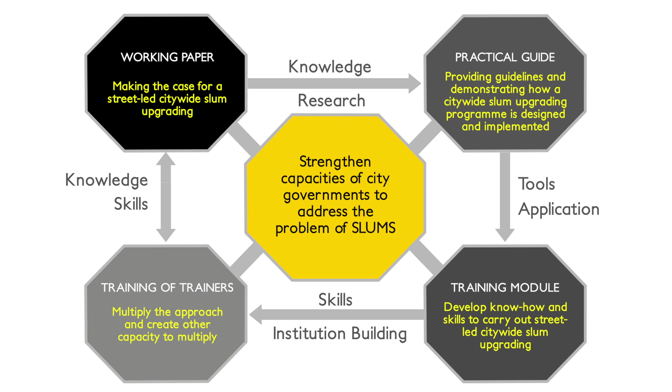This is part of a trilogy of work we've been doing in UN Habitat. We develop a working paper, then we develop a practical guide, how you move from project-based interventions to citywide programs, the steps you need to make, and then we develop training modules that we are applying and using with different city teams, and we hope that institutions, professionals will use this knowledge and the tools we've been developing to multiply and create a capacity around cities to address this fundamental problem, slums.

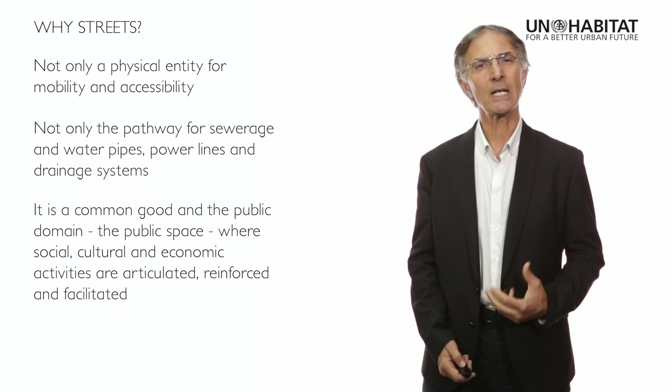Well, it's a vital element to improve the quality of life in urban areas. It forges identity because it creates address, the place making for communities, individuals, business. So you create the physical location of people, addresses, where you provide the basis for the legalization of tenure and defining rights and obligations, both of the state but also of citizens, by means of property taxes and services and so on.

Streets are also very important to define the urban pattern of a slum that will become a future neighborhood integrated to the city. So it's very important that we understand the role of streets, not only to create the physical structure, but the conditions for socio-economic integration and curbing what we call the social exclusion.

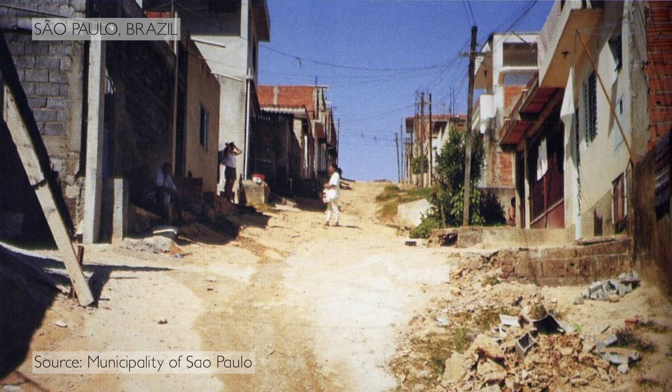Let's look, for example, in this case in São Paulo. In this photo, you can see very well that this is an informal area. The streets are not defined. The accessibility is very poor. You see the conditions of the housing.

Let's look at this case in Tirana, for example. In the periphery of the city, after the 90s, an incredible, remarkable, informal, unplanned urbanization took place. People were occupying available land, collective farms, and transforming. And then a group of professionals set up an NGO and started working with these residents and said, look, we have to define the public space, the future streets of these neighborhoods.

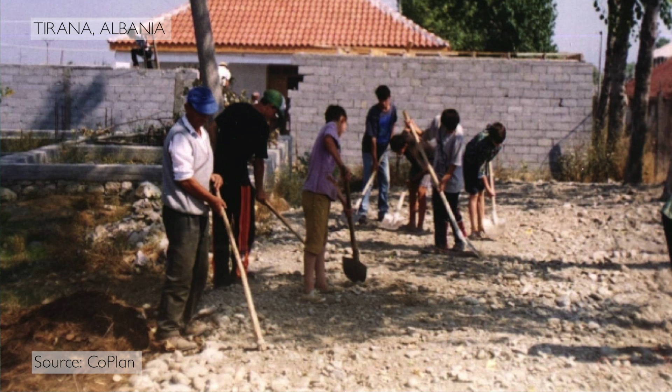And they actually got a recognition and a prize for this project. And they not only define the physical space, but they start creating communities by getting people involved in improving and defining what was called the public space, but in fact, future streets that connect this area to the rest of Tirana.

So now let's look at the problem of slums. The universal definition used by UN Habitat is very important because it allows us to define the scale and the magnitude of the problem and to monitor the implementation or achievement of the Millennium Development Goal 7 Target 11.

Well, the definition says that a slum dweller is one that lacks one or more of the following: the durability of housing, so whether the house is permanent, permanent or provisory building materials; inadequate living space, because we want to measure overcrowding; inadequate access to improved sanitation and improved water; and lack of security of tenure, which translates into the protection against forced eviction. Now, in a nutshell, I would have to speak about 4 points.

Urban growth has become a synonym of slum formation, which means cities are growing on the basis of informal land development and not on the basis of a plan, an enacted urban plan or a land use ordinance. We have an unprecedented informal and unplanned urbanization that is affecting the sustainability of cities. And now today we have that 1 out of every 3 urban dwellers lives in slum condition. So we have nearly 1 billion people living in these conditions.

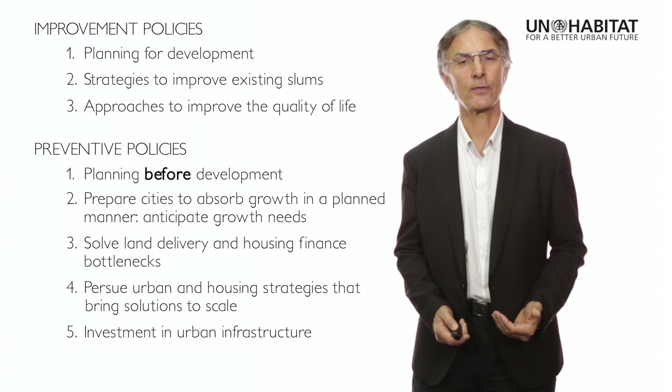Improving means planning for development. There is an existing informal settlement, an existing slum, and we need to improve. We need to design an approach to improve the quality of life. And on the other hand, planning before development: preparing cities to absorb this growth in a planned manner, solving the land delivery bottlenecks, creating opportunities for housing at scale, investing in urban infrastructure. These are some of the policies and strategies that help cities actually to prevent the formation of slums. We argue that this should be one single policy: slum upgrading strategy and urban housing strategy.

So the focus of my session is actually the planning for development, the area-based plan, opening the streets, creating area for infrastructure improvement, involving the residents, regularizing land, and so on. So we need a paradigm shift. More than 50 years of experience in informal urbanization, slum upgrading, etc., shows that we must abandon the project-based piecemeal intervention and favor a more programmatic scale.

So we argue that we need 3 fundamental shifts: from piecemeal project-based interventions to a program approach, to street-led slum upgrading as part of an area-based plan, and street-led citywide slum upgrading programs that are combined with strategies to deliver services, land, and housing at scale. So these are 3 elements of what we call a paradigm shift. Now you may ask, what is street-led citywide slum upgrading?

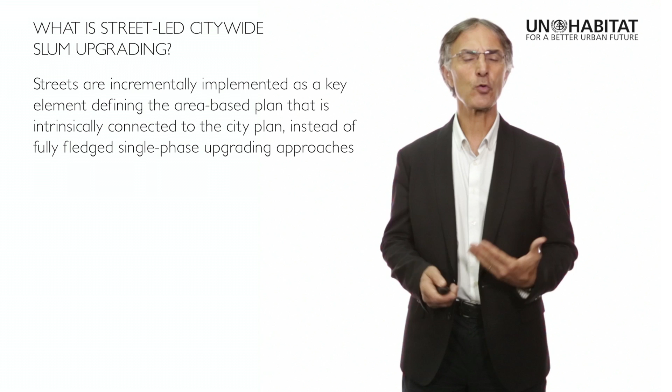Here is what we say: streets are incrementally implemented as a key element to define the area-based plan, which intrinsically connects the slum to the city, creates an urban structure and the pathway for mobility, for business, for people, for social interaction, and so on. So in this figure, you see the approach materialize: a city that has a number of slums, and by defining the fundamental, most important prioritized streets, we can start connecting these areas to the rest of the city.

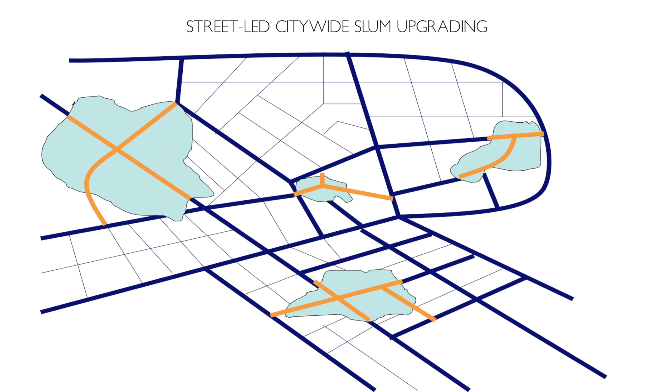So there are 4 elements that we consider very important in the street-led slum upgrading. First, involve the residents in planning and decision-making since the very beginning. Then, making a careful analysis of the patterns of streets, the residents' perceptions, how they access, how they appropriate the public space. Then we have to make choices of those streets that are chosen for improvement, those likely to bring the highest socioeconomic, physical and mobility outcome.

And fourth and finally, we need to make sure that there is land either within or nearby the settlement, so that those houses and families that need to be relocated in order to make room for the street and the urban structure of the slum can actually move to a nearby area without affecting their social capital and their interlinkage with the other neighbors and families, etc. So these are the 4 elements we argue.

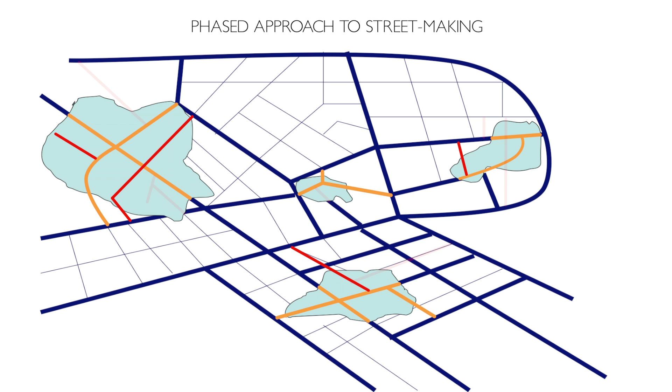So it's a phased approach, and in this figure you see very well that from one street you go to another, and gradually you start integrating and creating a decent connectivity of these areas to the rest of the city. But we have to make sure that we're not reinventing the wheel here. We're just arguing that the streets can play a fundamental role, and it can be cheaper, it can be feasible. We can start with the first most important streets and gradually, incrementally implement the other streets, creating a neighborhood out of these slums.

So the experience around the world shows, for example, in Lusaka, the Sites and Services and Slum Upgrading Program, beginning in the 70s, demonstrated that streets can play a role in creating community participation and decision-making on the future area where people live. So planning your own roads. The ministry in this case is promoting community participation by planning the streets. So defining a road committee, going to the discussion, defining the area-based plan and the streets that are prioritized, and then agreeing with residents to demolish their own houses that need to be rebuilt somewhere else.

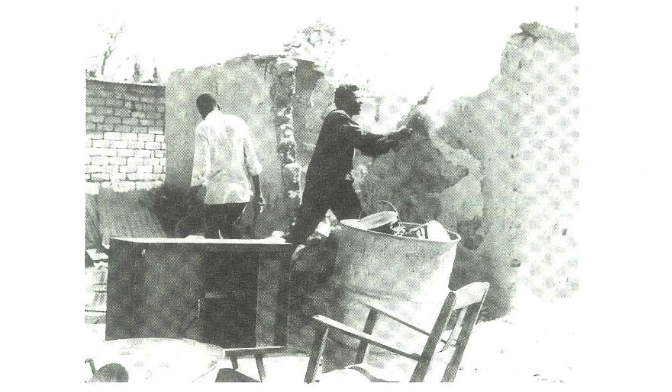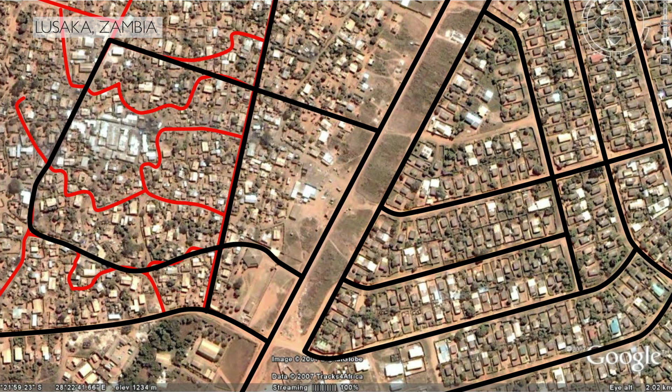So this has been done, there is no secret, and it's possible. If we can bring that to scale, within a program, we believe that it's possible to really start changing the situation of slums in the cities of the world. Now, this figure also shows the connectivity of the formal and informal, and gradually integrating these areas, you create a lot of opportunities for property regularization, for security of tenure, for business opportunity. You create an identity, an address. So we believe that this is an important strategy to pursue.

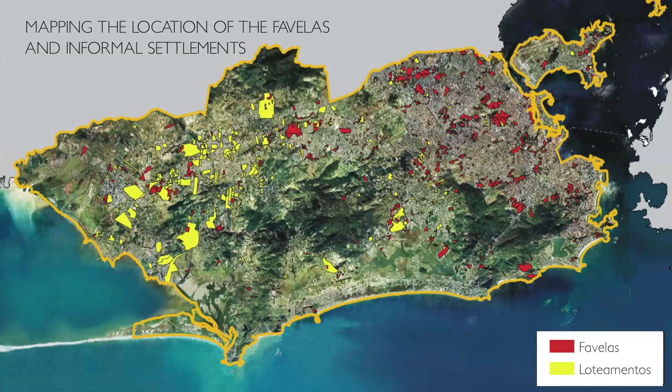Now let's look at another totally different context, the Rio de Janeiro Favela Bairro program. Here we have some lessons. Far from being perfect, this program provides us with very important lessons from more than 10 years of implementation. First, they identified the areas of informal or illegal land occupation, the favelas. They mapped them, created socioeconomic data about these areas, identified the typologies, then created the program and defined its fundamental elements. And as you see, sewerage improvement, accessibility, identifying the streets, creating squares, sports facilities, housing construction; the street played a central role in the strategy used in several favela upgrading projects.

Now, let's look at this example of Parque Royal. You see, the settlement was quite difficult in terms of accessibility. There were people living on top of water. They needed to be relocated to better housing.

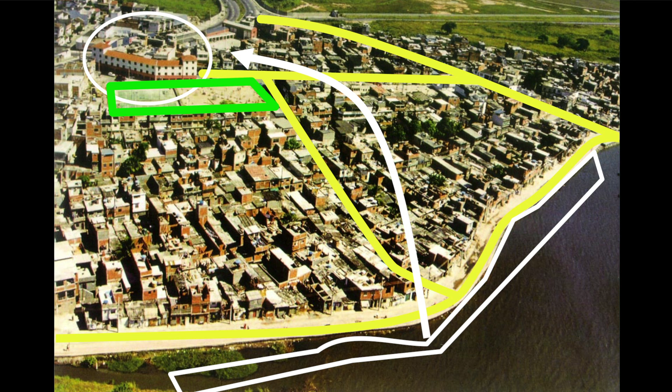So the plan was first identify the residents that had to be relocated, and then create a plan, an area-based plan, where areas for relocation were identified, areas for public space defined, and once this was implemented, people could be transferred. Those whose houses had to be demolished were transferred to a nearby area, and the settlement came out with a very clear structure, and the connectivity with the nearby neighborhood is quite clear, as you see in this photo.

But the most important is how do you go to scale, to a program scale? And this is where the Rio Favela program is a very good lesson. Now, the municipality initiated the program by creating a competition for ideas with the Institute of Architects, the planning and architecture department firms, private firms. They responded with 50 plus ideas.

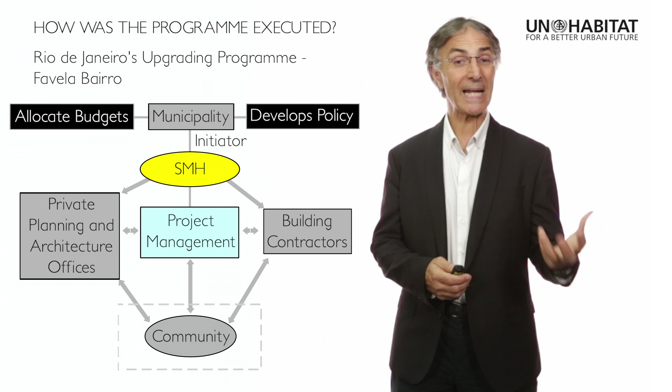Then the best ones were commissioned to make the plans, and once the plans were ready, they went for tendering for implementation, and the condition was that the community and the residents were involved both in the implementation of the plan, meaning preparing the plan, but also in the execution of the works. So it was very interesting, and this inspired the Inter-American Development Bank to pursue similar models in other parts of Latin America.

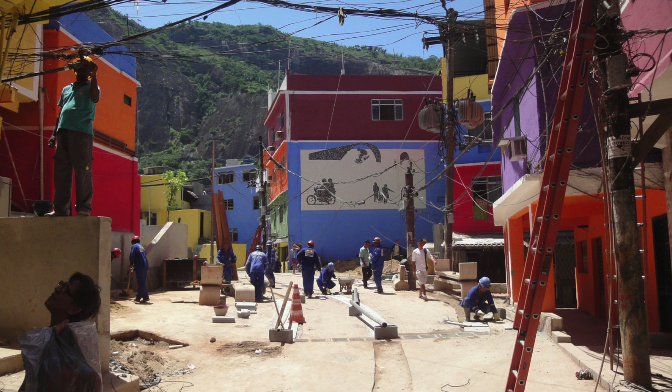And you see some photos of favelas, where you see quite clearly these areas being transformed into formal neighborhoods, gradually creating infrastructure, a path for pedestrians, a road for accessibility of, for example, the truck that provides the gas bottles for the residents, and ambulances, etc. And this created a history in the city where you could look at this photo and say, well, this could be in any formal neighborhood, but it actually is a favela upgrading, which started from improving the streets as a point of departure.

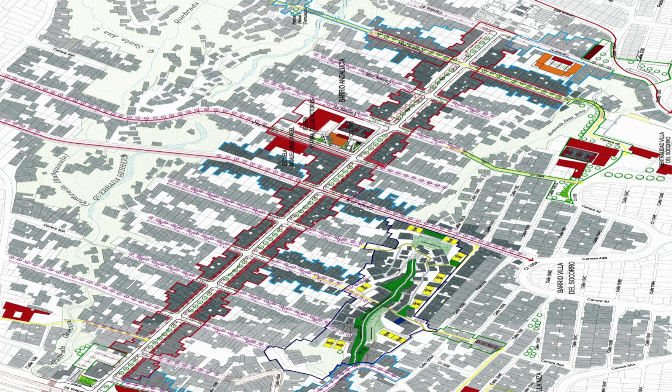And now we go even to another scale in Medellin, in the nearby country of Colombia, where they had a significant amount of informal settlements totally disconnected and excluded from the city. And the goal was to define a plan which would connect these areas to the rest of the city by a very innovative public transport, but using this public transport as a way to create streets. So they had to actually pave the way to connectivity, which means identifying the houses that had to be demolished, and they had to be compensated and rebuilt within the area.

The level of satisfaction of the residents is very high. Nowadays we observe along these streets and public spaces, where you have libraries, where you have public services, a lot of social appropriation, and business development is taking place. And people feel really proud, and people now feel safer. They feel identified with the area, and we see many positive developments coming out of this intervention.

But this was done over and over, including in Indian cities where the slum networks did exactly the same, connecting the slums between them, identifying the infrastructure and the road connectivity that would connect all these areas to the rest of the city. So it's not something new. So the issue is, how do we move from piecemeal to program? We are suggesting 5 important stages of a street-led slum upgrading project. So creating the projects: getting started, getting the plan, implementing the plan, and then the post-upgrading.

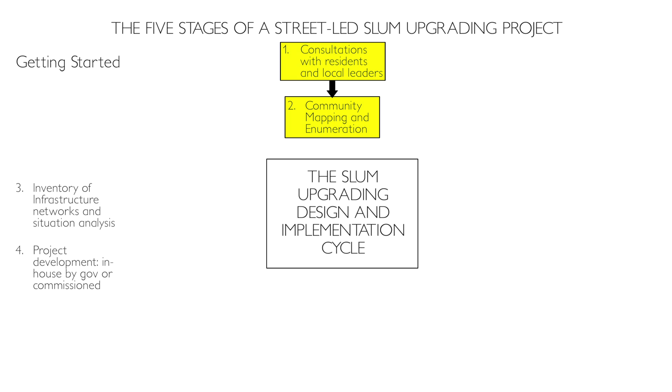Now getting started: doing the consultations with the residents, doing community mapping, enumeration, so doing an inventory of what we have in terms of infrastructure, in terms of social capital, so really getting the project development started. Then we prepare the plan with a maquette, with several illustrations to dialogue with the residents, designing the layout and the street pattern, and doing a lot of community participation in order to define the priorities of the streets that need to be implemented, and then approving the street-led plan.

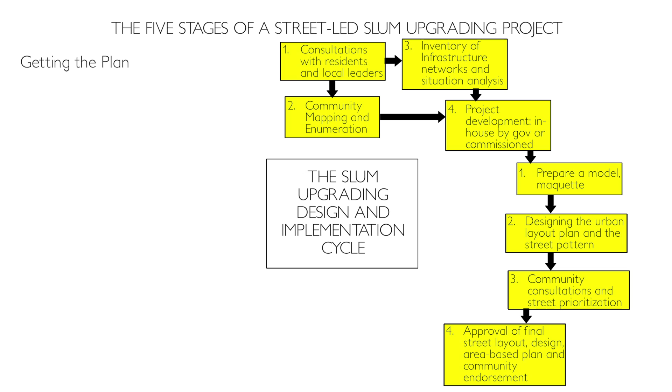Once this is approved, then we go with the final plan, either for procurement or municipalities who are able to implement with their public works department. They can easily pursue, let's say, the main street that has been approved, making sure that we're doing this as part of an area-based plan. So we open the streets, we start regularizing land. We create housing reconstruction programs so that people can really be relocated, and we have in this phase a lot of resettlement when the case requires. And then we have the post-upgrading, because we should make sure that these areas are not transformed into slums. So we need to have a social pact with residents.

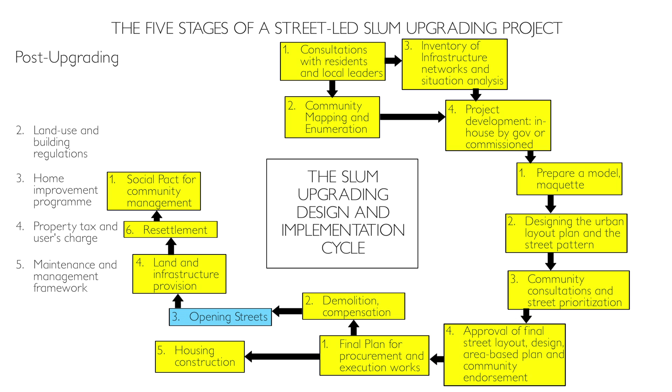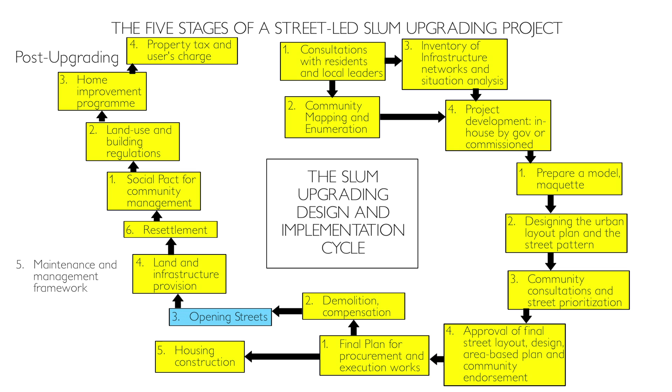So how do we maintain the public space? How do we do home improvement? What is the property tax and the user's charge that will be incurred by residents? How do we do the maintenance? How do we do the management? So there are a lot of things to ensure that these areas actually consolidate.

There are some problems, and we have identified some obstacles facing the adoption of what we propose as a city-wide, street-led approach to slum upgrading. And I'm going to outline 7 obstacles. There are probably a few more, but the first one is conventional planning, the attitude of planners.

Now, we're dealing with an existing settlement. Our tools, our planning instruments have to be totally different than planning on free land. So we need to accommodate. We cannot adopt a blueprint approach to planning; we need different types of dialogues, participatory mechanisms. It's no longer possible for us to define the framework alone. We need to involve the residents in that.

Well, the scale is disproportional to the capacities and resources that we have in local authorities. And that's why we need to lower our expectations and adopt an incremental phased approach on a street-per-street basis, which we believe municipalities will be able to implement. Also, the institutional organizational capacity of municipalities is not always in place, so we need to create a very conducive institutional organizational environment so that a program with multiple interventions can take place and be well managed.